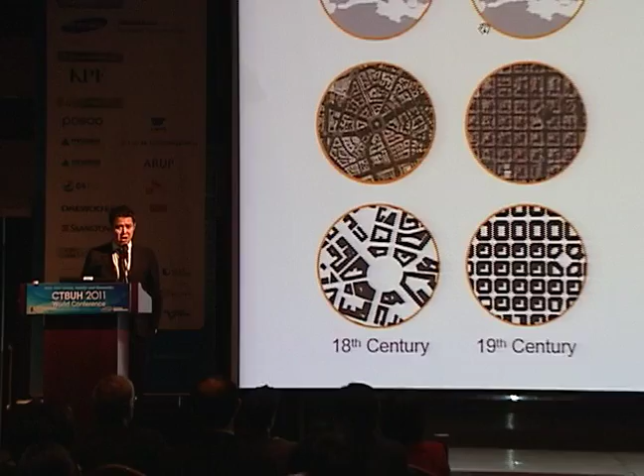I'm now living in Singapore, but I'm actually from the UK originally. Singapore is certainly a high-density urban environment, and we see many an Asian city going in that way. But when you look at these figure ground diagrams from the 18th century, be that in Rome, or through to the 19th century of Barcelona, or the 20th century of Portland, or even the 21st century of Singapore, what we see is the gradual eradication of those open white spaces. The white spaces that were once so intrinsic to our social interaction, our meeting and greeting, our means of movement through the city.

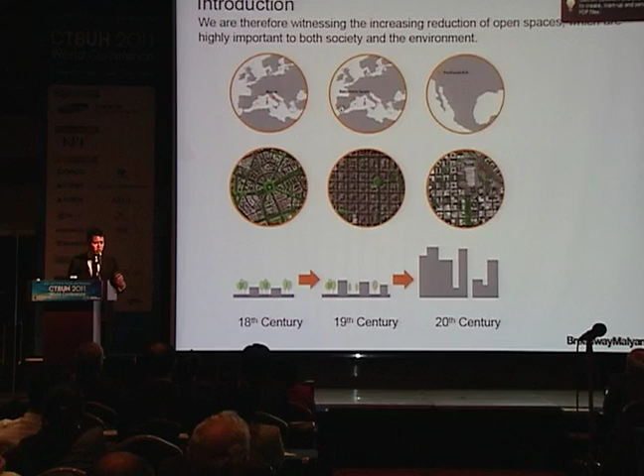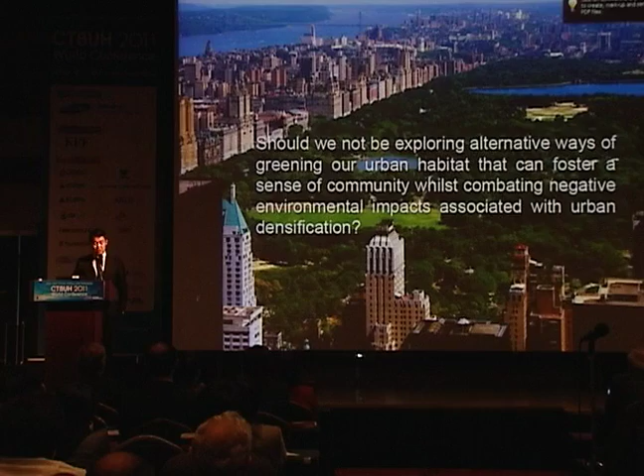Similarly, with the depletion of those open spaces, we're seeing the gradual eradication of those green spaces. Once upon a time, the green lungs of our city that allow us to have more communal environments and to have shade and shelter are gradually being eroded away. So should we not be exploring alternative ways of greening our urban habitat that can foster a sense of community whilst combating negative environmental impacts associated with urban densification?

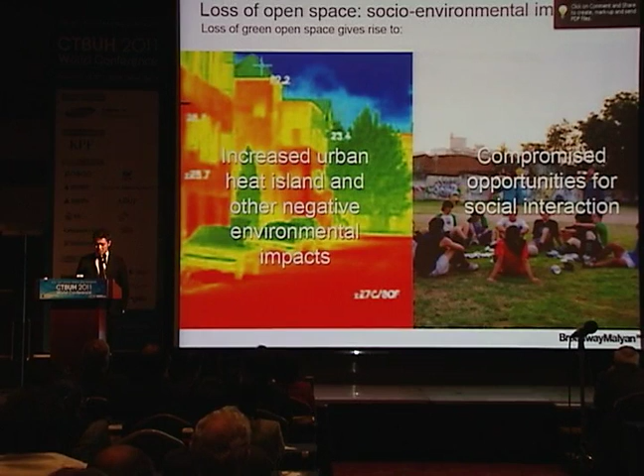So let us consider the loss of open space and the socio-environmental impacts. As I'm sure you're all aware of the urban heat island effect, with the loss of green open spaces we are seeing increasing rise to urban heat island effect and its other negative environmental impacts. But at the same time, we're seeing huge social implications. The opportunities that were once for us to be able to socially interact in public in these open spaces are slowly being eradicated.

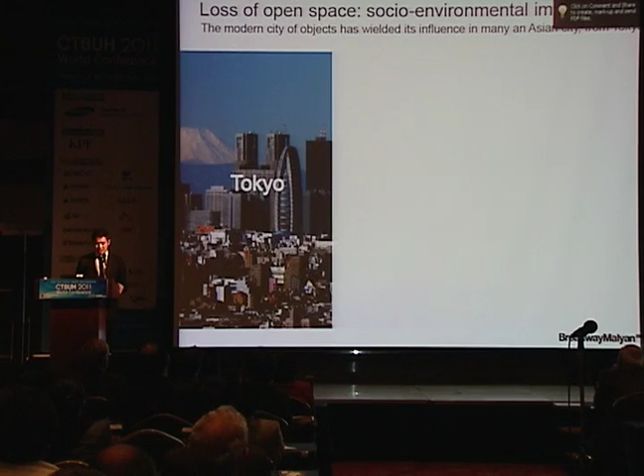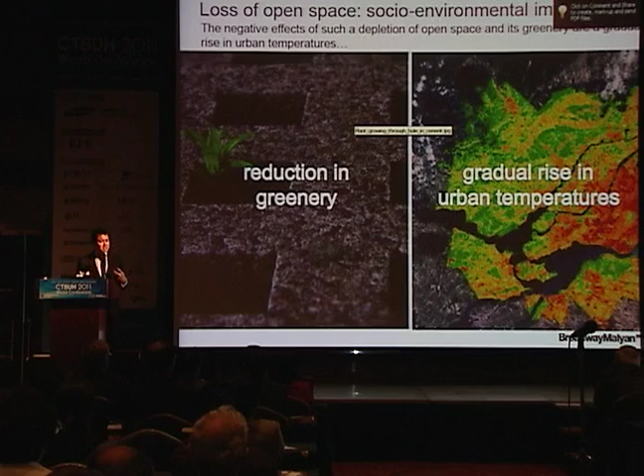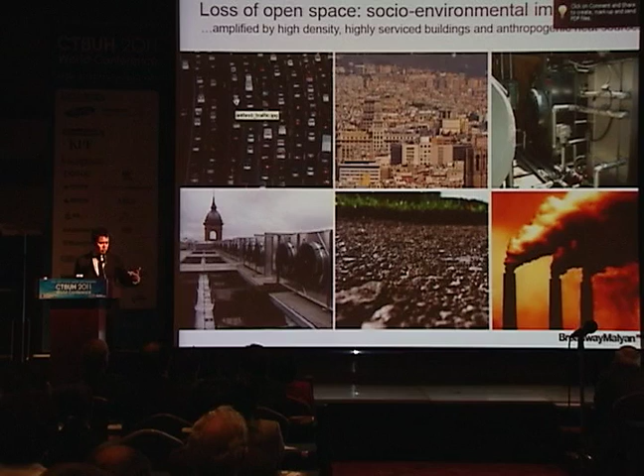I guess the modern city of objects, those gas-guzzling behemoths that we see in so many a city, be that Tokyo or Hong Kong or Singapore, is certainly also seeing the reduction in urban greenery. The negative impact of that, as I've just mentioned, is the gradual rise in urban temperatures. Urban heat island effect can be defined as the temperature differential between the rural and the urban habitat. And then when you think about the human amplification of high density, highly serviced buildings and the anthropogenic sources of heat, be that via the automobile or the air conditioning system or the harder surfaces within our urban habitat, it leads naturally to those cataclysmic effects of climate change and UHI.

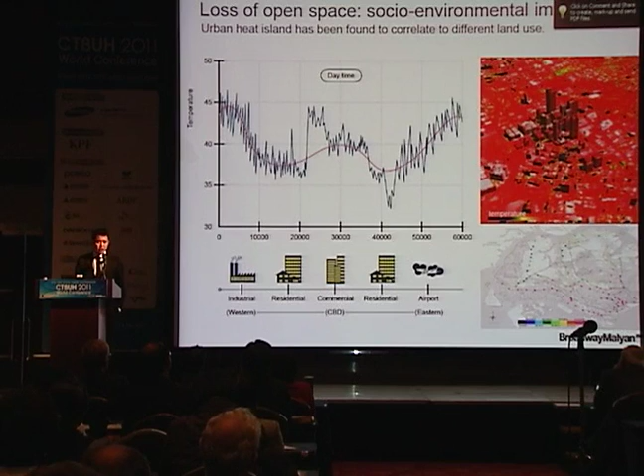Interestingly enough, the residential areas actually have the cooler temperatures given the expanse of green open spaces for residents to enjoy. But in addition to the removal of the greenery and the open space, we also see the compromising of certain social and spatial mechanisms.

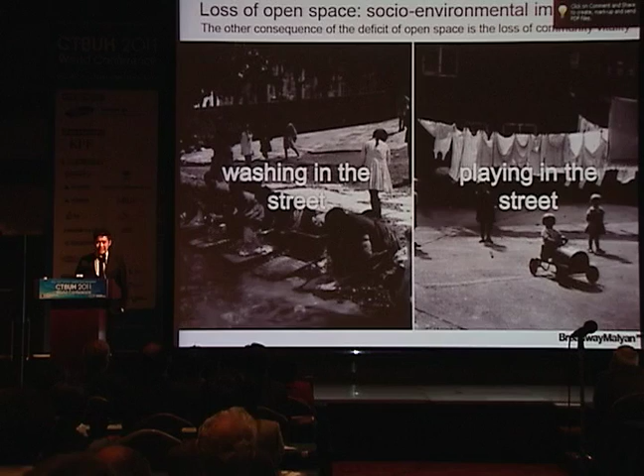The consequence of that deficit in open space is the loss of communal activity. Once upon a time, we used to be able to wash in the street or even play in the street. So what this means is that we're increasingly having to find alternative social spaces for social interaction.

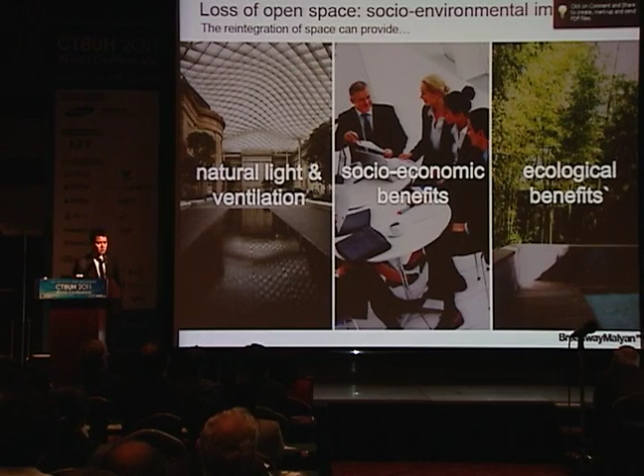After all, it is the space that provides natural light and ventilation. It provides certain socio-economic benefits and ecological benefits, which we will see in a few case studies.

As I mentioned, we see that replenishment of open spaces in our urban habitats today, particularly in the form of the skycourt and the skygarden within these increasing hybrid structures taking place around the world.

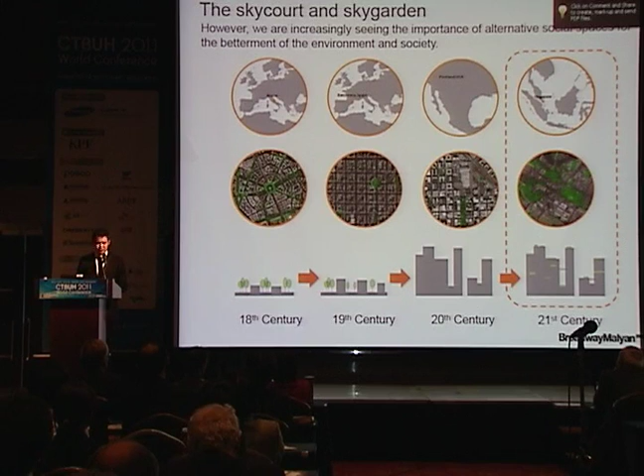One could argue that if in the 18th century the court was a social space that was an opportunity for philanthropists to give back to civil society, or even the 19th century arcade, then perhaps in the 21st century we're seeing an increasing quantum of skycourts and skygardens being given back for social means and civil society to enjoy.

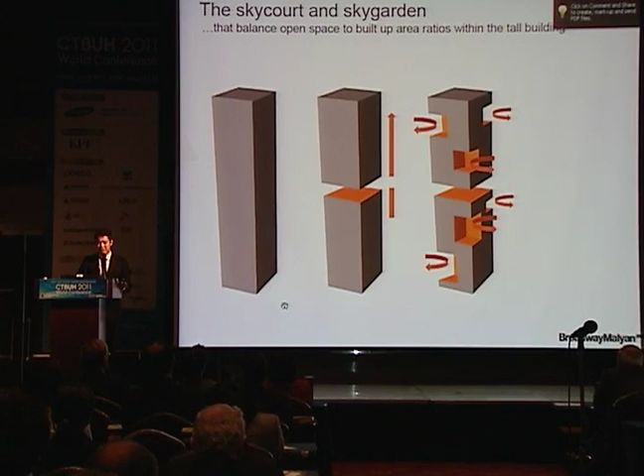Skycourts can be spatially defined as those interstitial spaces that take place within buildings that balance the open space to built-up area ratios within the tall building. And when placed at the top of the building, they can also create certain income-generating opportunities.

What we see in the form of the skycourt and the skygarden is the fact that they start to balance some of the loss of open spaces that were once so intrinsic to our day-to-day activity in the street and the square.

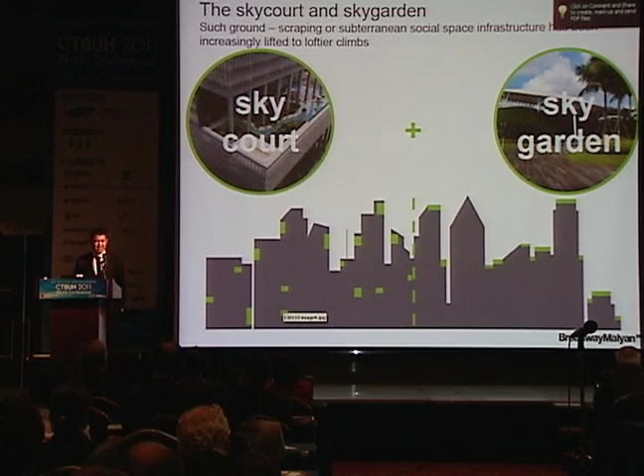In Singapore in particular, whereby temperatures can be quite high, we see lots of people running to the shopping mall to enjoy their 18 degrees centigrade of retail mall temperatures. But increasingly we're seeing similar flocks heading towards the skycourt and the skygarden, in addition to subterranean places.

I think it is quite important to note that in the case of Singapore, there are certain incentives. Singapore has taken measures to legislate the incorporation of skycourts, as can be seen in Singapore Urban Redevelopment Authority Circular 2009.

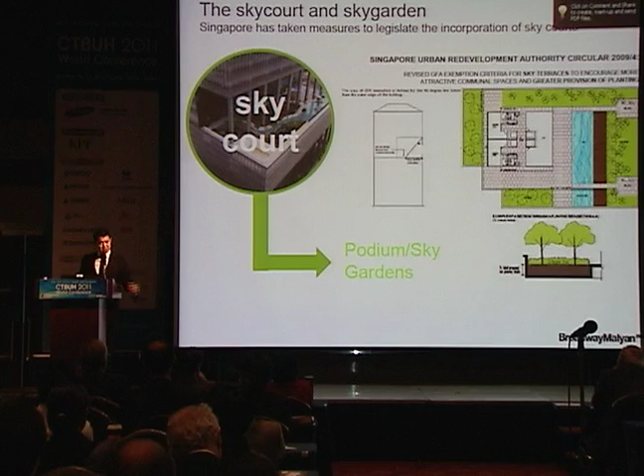The revised GFA exemption criteria for skycourts and sky terraces encourage more attractive communal spaces and greater provision of planting. Ultimately, developers are encouraged to incorporate skycourts and skygardens and can actually get exemption for GFA, thus being able to build more, all for the betterment of the building occupants.

We see this in some particular examples in Singapore. The National Library demonstrates the socio-environmental properties.

It actually has 16 stories. It's a state-of-the-art facility. I guess it is questionable whether it is actually a tall building, but then again, when you look at the context of the environment, it's about 5 to 6 stories in the region.

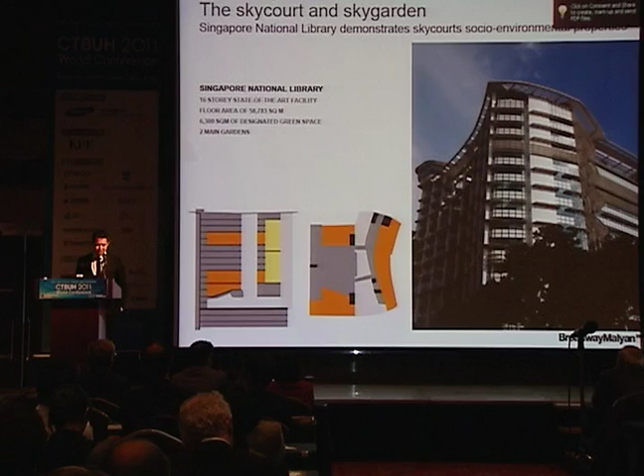But what is quite curious is that it has 2 main sky gardens, 6,300 square meters of designated green space in total. That provides an opportunity for good quality light to come in, and also ventilation for those who want to study outside, as you can see with these students here.

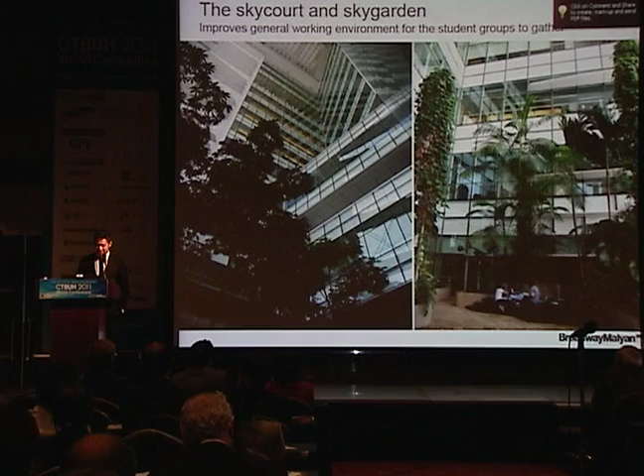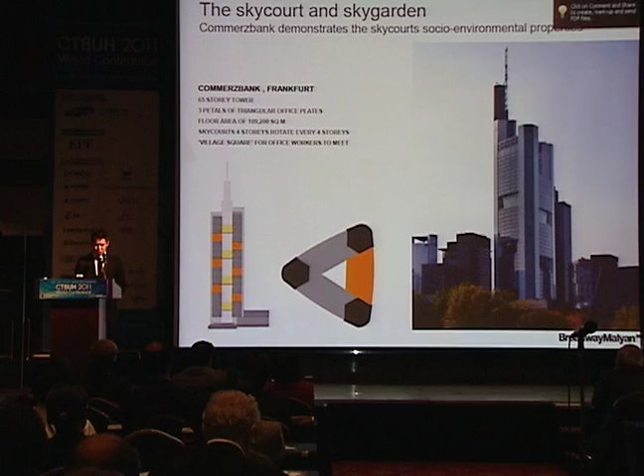As Anthony highlighted earlier, Commerzbank is a prime opportunity to see how you can start to integrate skycourts within an office building to foster a greater sense of workplace community and enhance productivity. 4-story skycourts rotate every 4 stories up and around the building to create essentially village squares.

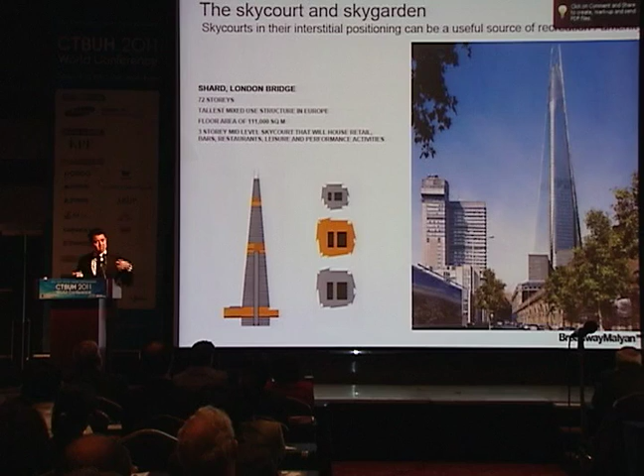The Shard in London Bridge, 72 stories, will be the tallest mixed-use structure in Europe. It has 3-story mid-level skycourts that will house retail, bars, restaurants, leisure and performance activities, ultimately acting like a spatial gel, gluing disparate facilities together for the interaction of the occupants. As Renzo Piano describes it, it's a small vertical town for about 7,000 people to work in and enjoy.

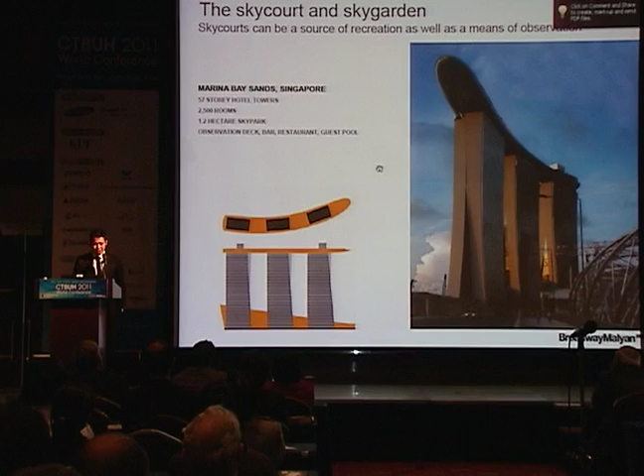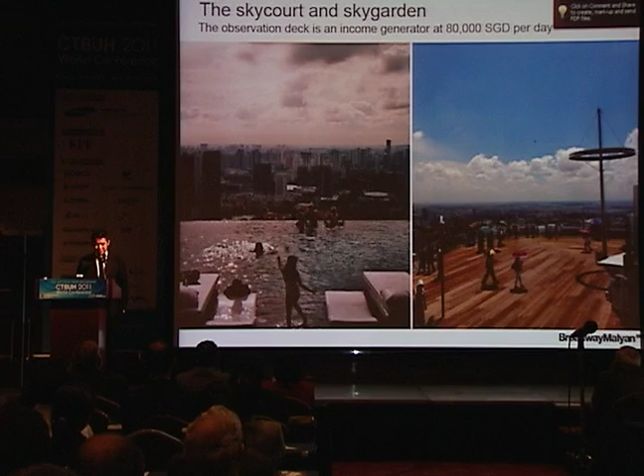Let us not forget the Marina Bay Sands in Singapore. At 1.2 hectares of sky park, it's quite colossal. But it's also an income-generating opportunity, as one wants to be able to get a view over the Singapore skyline, and it generates about 80,000 Sing dollars per day. Though I do not fancy anybody trying to swim to the edge. It is slightly scary.

What these examples demonstrate is a new hybrid that balances space within the object, opportunities for natural light and ventilation, opportunities for social interaction, opportunities for an ease of movement. But at this current point in time, there are some fundamental issues: they are not public spaces. For the best will in the world, we want them to be, with the characteristics of the public domain that we see on the ground. We have got a long way to go.

But yet again, they do have certain public domain characteristics, opportunities for us to interact. And it's generally the public sector, in terms of the library, that is actually having a greater opportunity for those open spaces to be incorporated in them.

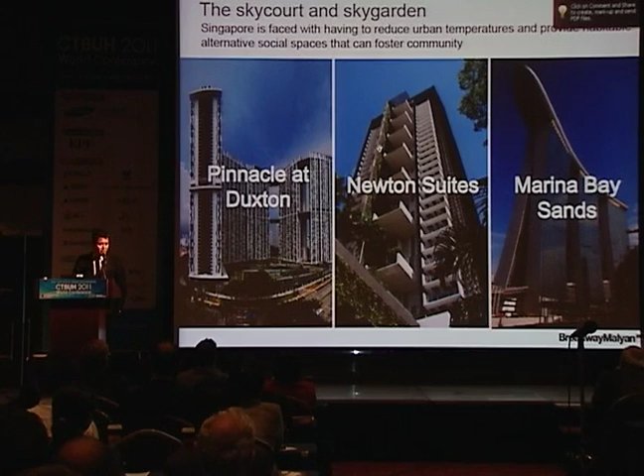Singapore is faced with significant issues, urban heat island effect, as well as a rising population that from 5 million people will be 6 million by 2020. So the importance of being able to balance space as well as greenery within these hybrid structures is coming to the fore in examples like the Pinnacle at Duxton, a residential complex, Newton Suites, and the Marina Bay Sands.

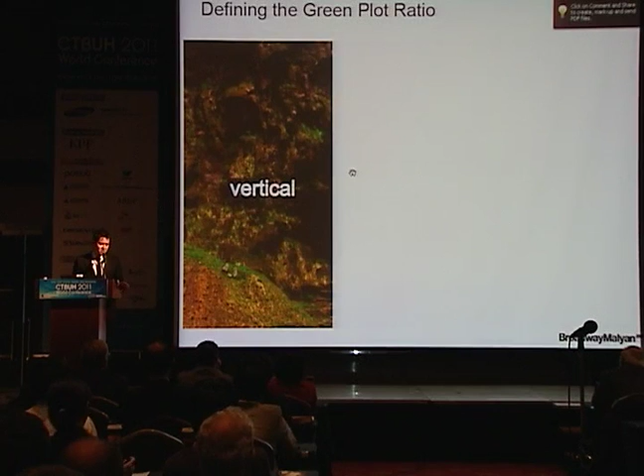So what of the green plot ratio, and how does this tie into the whole idea of skycourts and sky gardens? Well, what we need to bear in mind is that greenery doesn't just exist on the horizontal plane, it's also the vertical and the diagonal. Similarly, we're increasingly seeing the incorporation of greenery on those vertical, diagonal, and horizontal planes.

We only have to look at Chicago, for instance, and see how the 2.5 million square feet of rooftop greenery has been able to reduce ambient temperatures by between 1 and 4 degrees centigrade through the ethos of Mayor Daley. So increasingly, the incorporation of urban greenery is certainly helping us control those ambient temperatures.

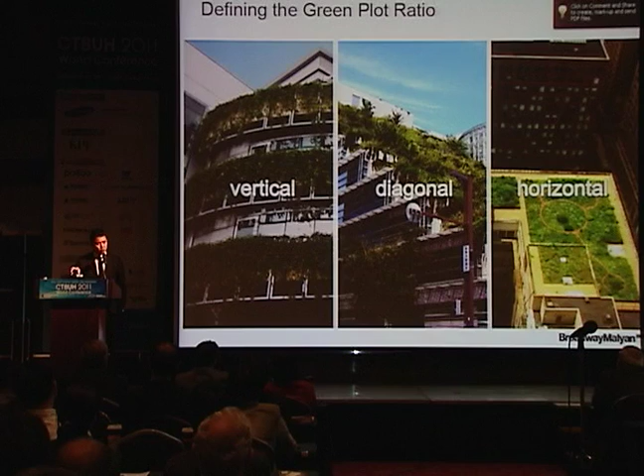This was something that the Singapore government were particularly keen to try and explore, the idea of being able to quantify the greenery, to be able to understand what the properties of that greenery are, whether that's water retention or carbon sequestration or the ability to reduce ambient temperatures.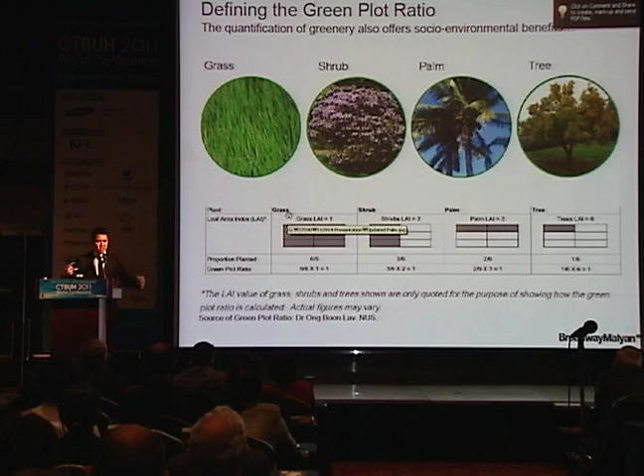Grass, shrubs, palms and trees, they all have different leaf area indexes. They all have a different area of greenery. And so when you look at a shrub which actually has quite a lot of density, it actually has greater water retention and urban ambient temperature reduction properties over, say, a sparse palm tree.

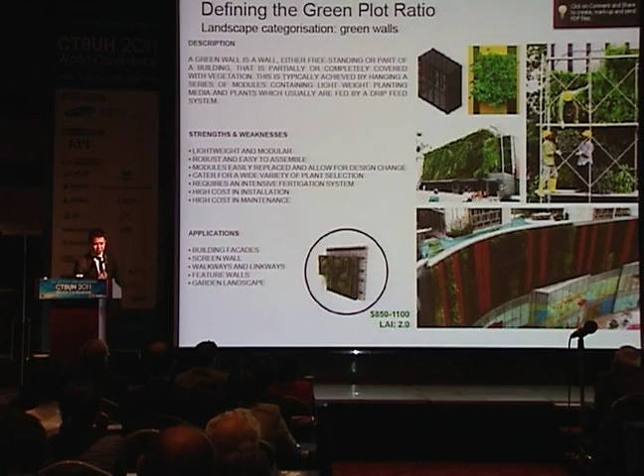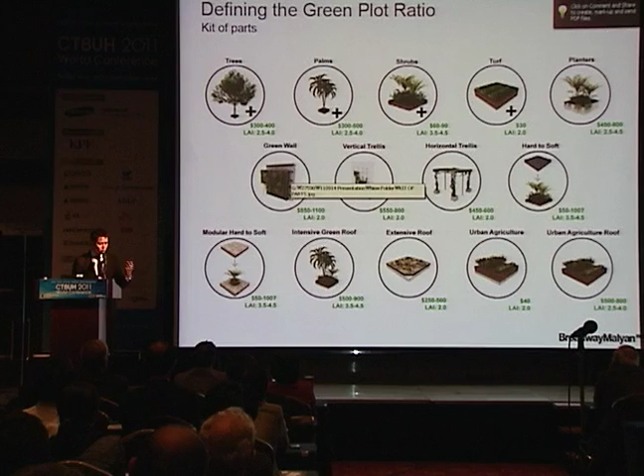This led us to a review of 100 buildings and their landscape sites within Singapore, looking at the residential, industrial and commercial centres, and allowed us to then start to categorise the different types of urban greenery, be that green walls or planter boxes, which allowed us to eventually get to a kit of parts, a 1 square metre kit of parts that each had its own leaf area index and own biological measures, each quantified per square metre.

What this allowed us to do was then to apply this across the horizontal, diagonal and vertical surfaces of tall buildings in order to look at how it could mitigate glare, how to mitigate ambient temperatures rising, and also to actually try and improve the thermal performance of the building.

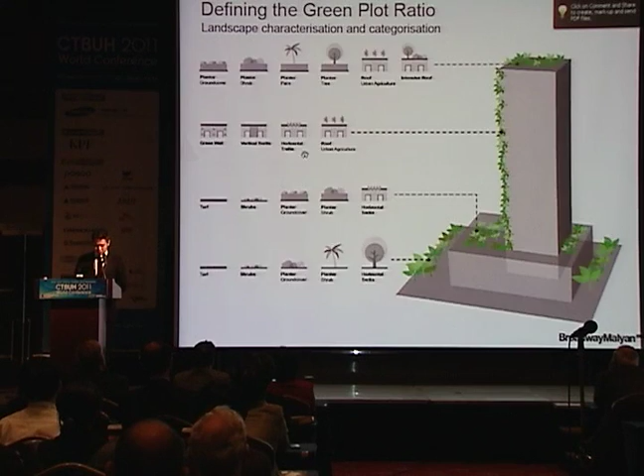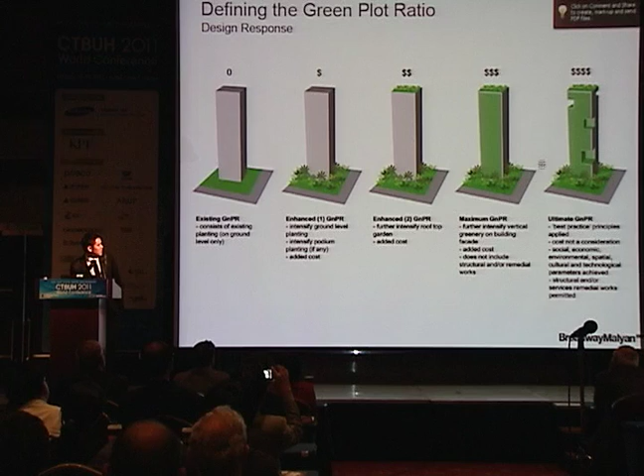It also allowed us to start to quantify the incorporation of greenery, be that from just the horizontal plane to then densifying the greenery, placing it on the rooftop, placing it on the surfaces, or even cutting in skycourts and sky gardens for further social and economic opportunities.

This is something that we're now applying to buildings, and it's, I guess, quite apt that this section is on compact and green. This is not a tall building. This is actually a bit of a baby. It's only 12 stories in height, quite compact.

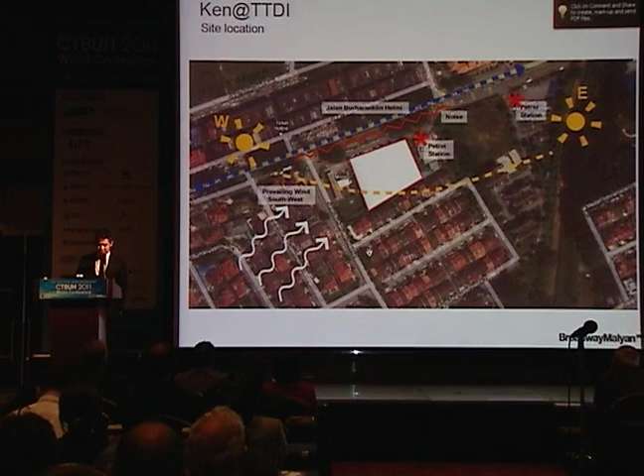It's a site in Kuala Lumpur, to be precise, a place called Taman Tun Dr. Ismail. And the site was originally a greenfield site which had a green plot ratio of 1.13. So we added up the quantum of trees and palms on the surface, and you basically add up the leaf area index and you divide it by the site area to give you the green plot ratio.

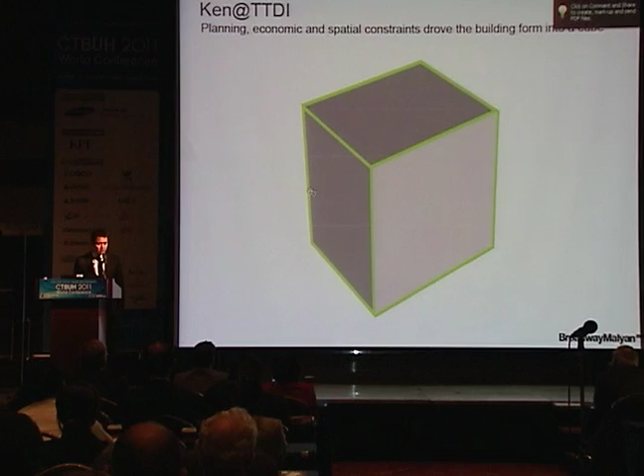Given the planning, economic and spatial constraints, it drove the building into a slightly more extruded cube. What was quite curious about the building program, though, is that it's actually a very, very mixed use and compact building. Workplace, hospitality, retail, lifestyle, arts and leisure all come together in this building.

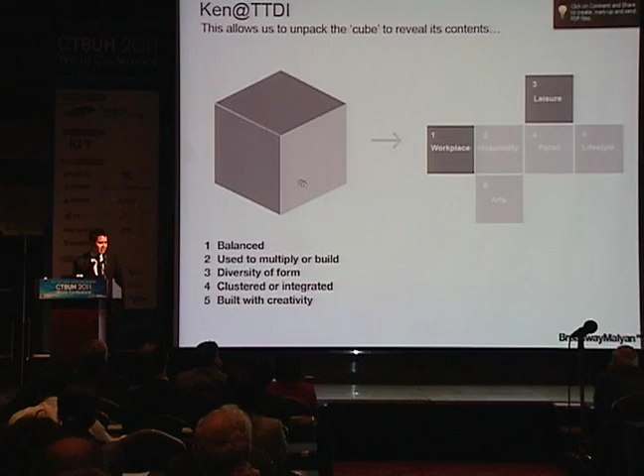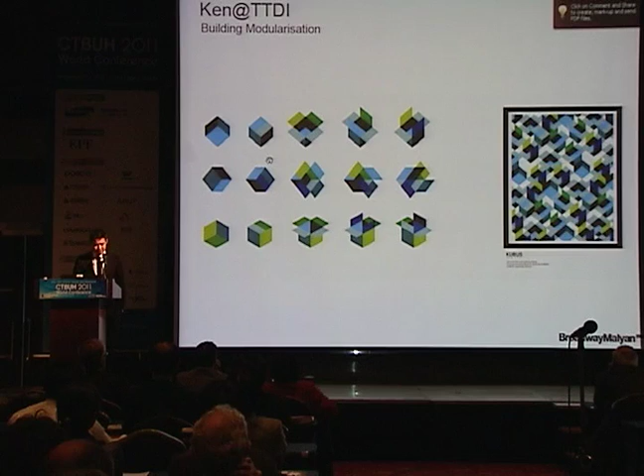Somewhat metaphorically, it actually responds to the 6 sides of a cube. It allowed us to then explore the idea of unpacking that cube, which could then also help inform the facades by thermally mapping the facades in order to be able to position the greenery.

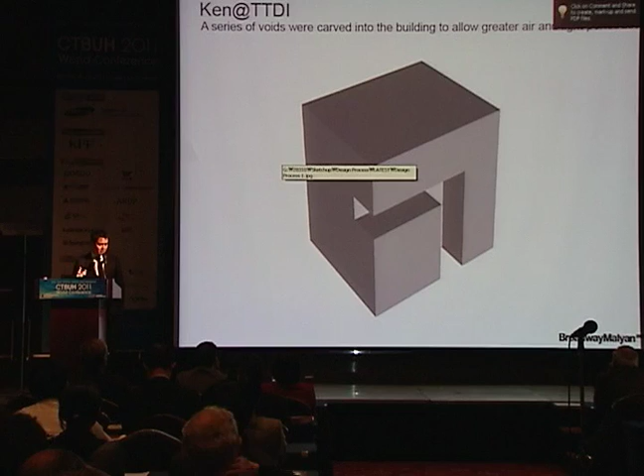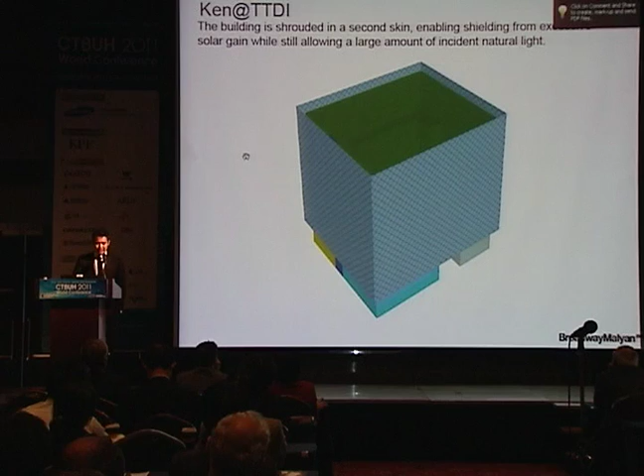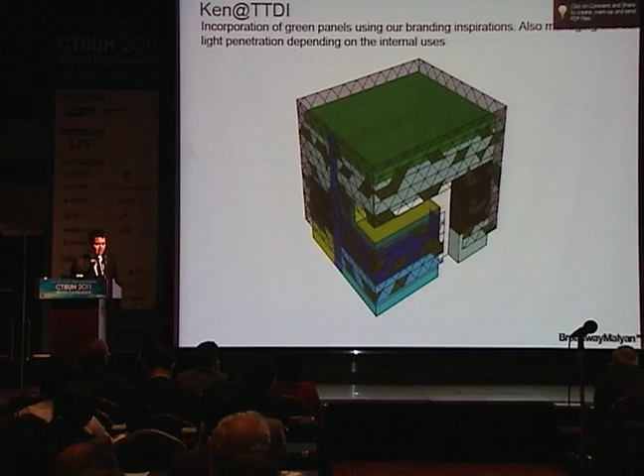This compact form allowed us to start to cut a series of voids for the opportunity to draw in natural ventilation and natural light. The mixed-use program of those 6 disparate functions were then strategically placed, and a skin was wrapped around the surface that would then allow us to cut further holes and apply a series of green panels and expanded mesh that would almost be mapping out the thermal performance of the building.

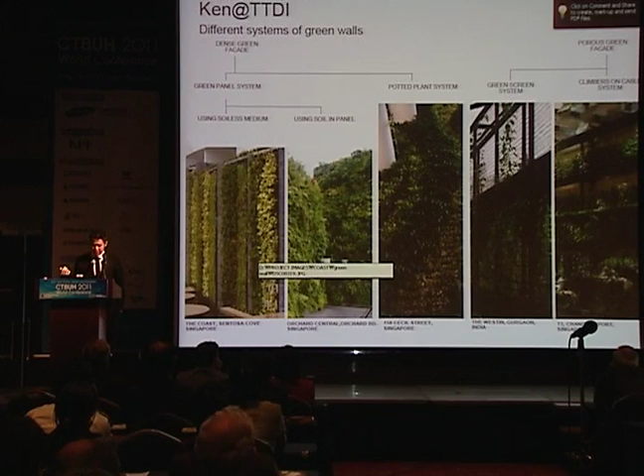So the idea to try and look at vertical greenery as an environmental skin, if you will, allowed us to move forward to look at the different leaf area indexes of different types of vertical planting. Some are actually far more dense, which would be ideal for areas whereby there is a greater amount of solar heat gain, be that to the east and west elevations, and slightly more porous and open where you wanted to actually get a bit more daylight.

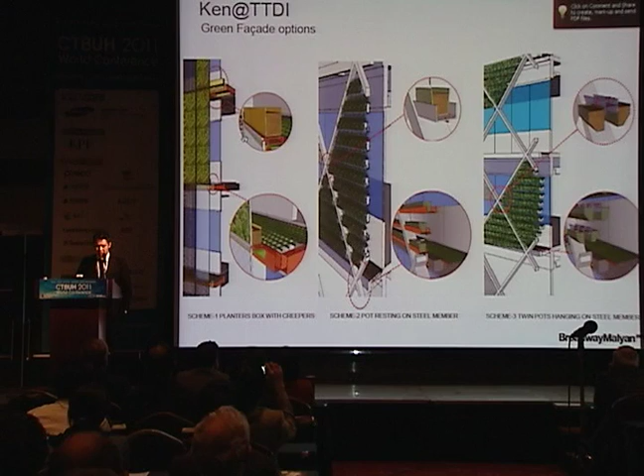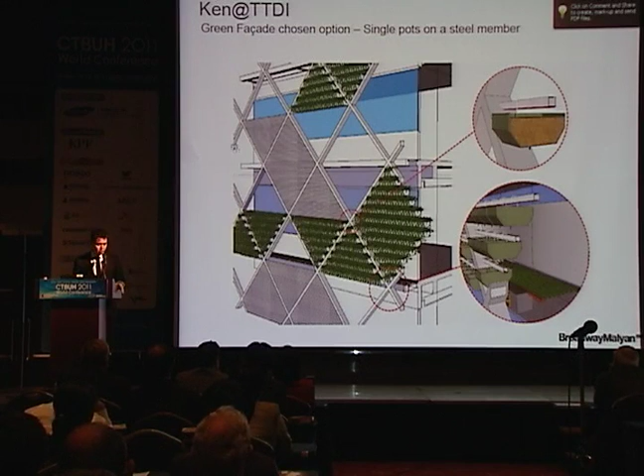This then lent us to a various series of studies to look at the various hanging options before we got to a planter pot solution that was hung within a diagrid mesh, expanded mesh, that would allow for light to percolate through, but also to rely on the greenery to actually improve the thermal performance to the east and west facades. This was actually mapped out, and what we saw without this mesh or greenery was that the average west-facing facade received direct radiation of around 700 kilowatt hours.

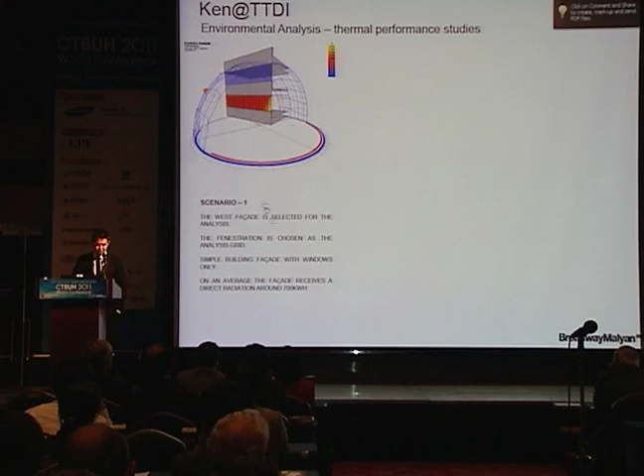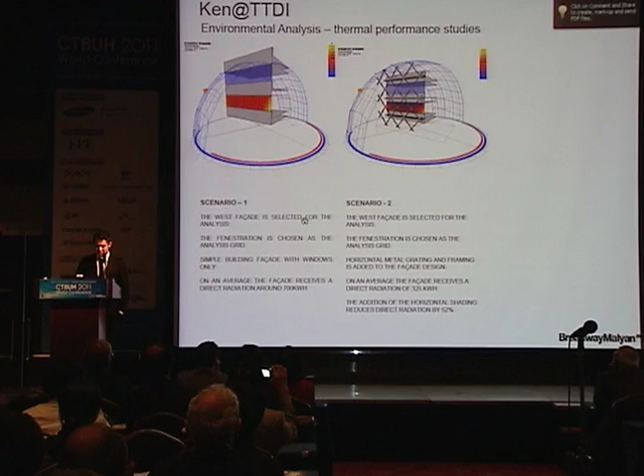When we added the mesh and grating and the grid structure, it actually reduced the direct radiation by 52%, but then it was enhanced further with the incorporation of the greenery by 16%.

We also noted that there was an improvement in terms of glare performance. So the ability to consider the external skin as a continuation of the greenery from the ground into the sky, by having that continuum along the vertical surface, also provided the environmental benefits of providing a bit of a shield to the harsher conditions of the tropical climate.

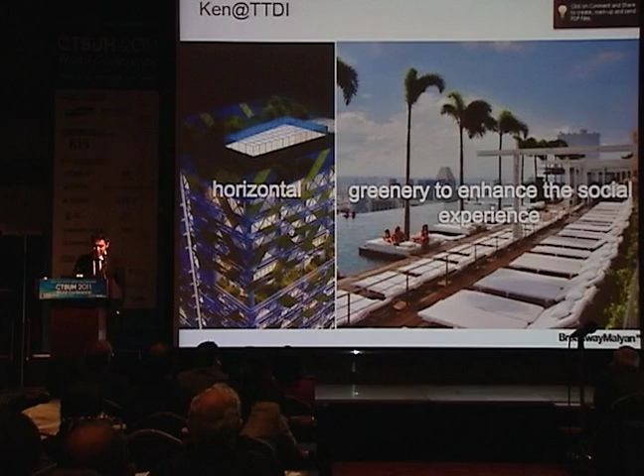In terms of the horizontal plane, we wanted to experience the more social and communal activities through the skycourts and the sky gardens. Children's play areas and creche areas, herb gardens that would allow us to actually grow vegetation for the on-site restaurants, swimming pools that could also be water retention areas so that the water collected could be used for the irrigation of the planting, and outdoor gymnasia and yoga decks were key for the survival and the replenishment of those activities for the workers within the building.

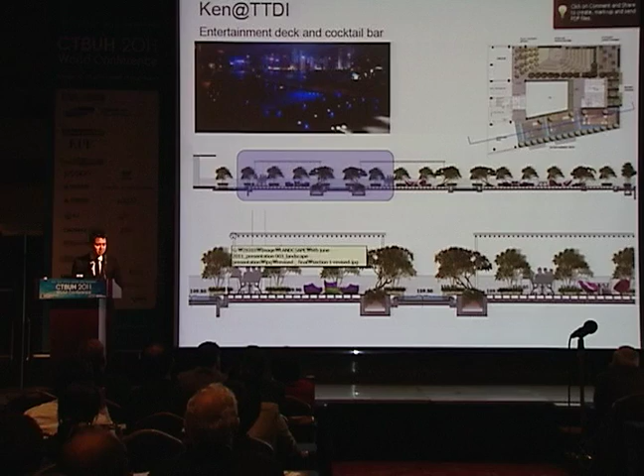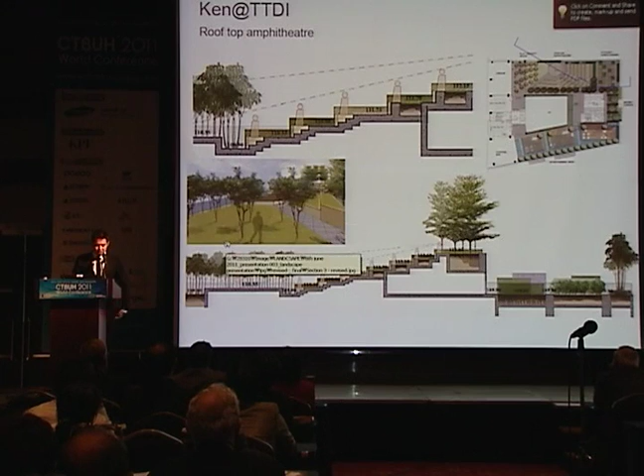It also had entertainment areas that could be income generating, and an amphitheatre deck. So all of these different spaces were not only for social betterment, but it was also an opportunity to be harvesting the additional rainwater that could be then used for irrigation of the planting.

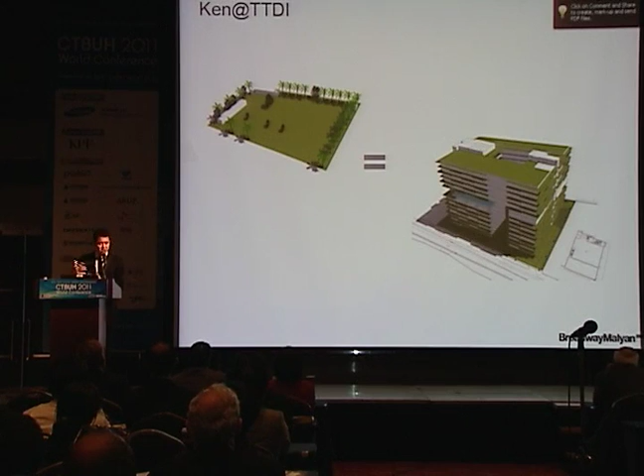The net result was basically the ability to not only balance the existing greenery on the site, and I think it's important to note here that if you have 12 trees on a site and you were to remove the 12 trees for urban development, would we not want to be replenishing the 12 trees? Sometimes you don't have that space, but by using the green plot ratio method, you're able to still balance the quantum of greenery by looking at shrubs and vertical surfaces and diagonal surfaces in order to create that sense of equilibrium.

So what was originally 1.13 in terms of green plot ratio, we were able to actually increase the greenery to 5.98 at a cost of $3 million. What this meant was that we are now able to assess the energy savings based on that additional greenery.

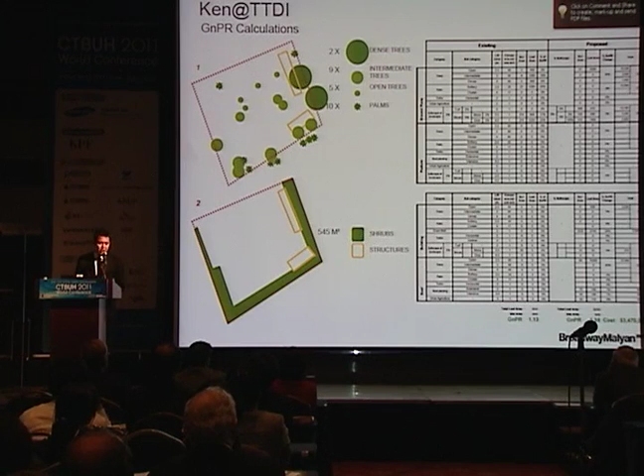I think that means I'm going to be wrapping up soon. I assure you that I will be finished within the next 2 minutes.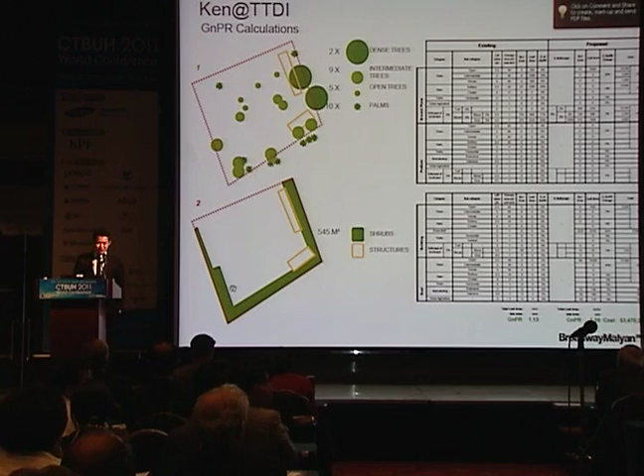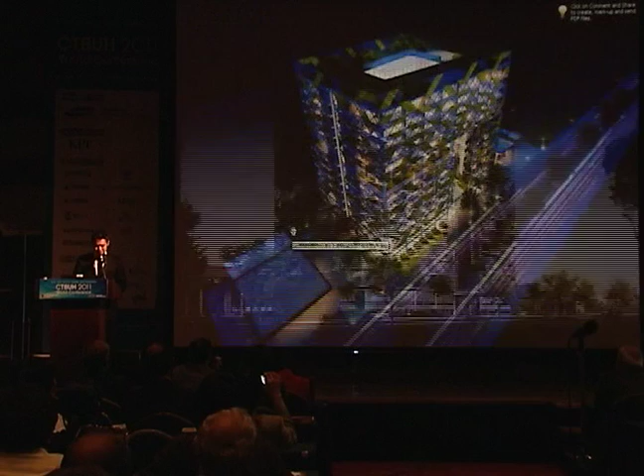So, it's almost like voiceover man. So what started out as an idea of having an environmentally performing skin has also been vertically extrapolated into social spaces in the sky. And to the conclusion.

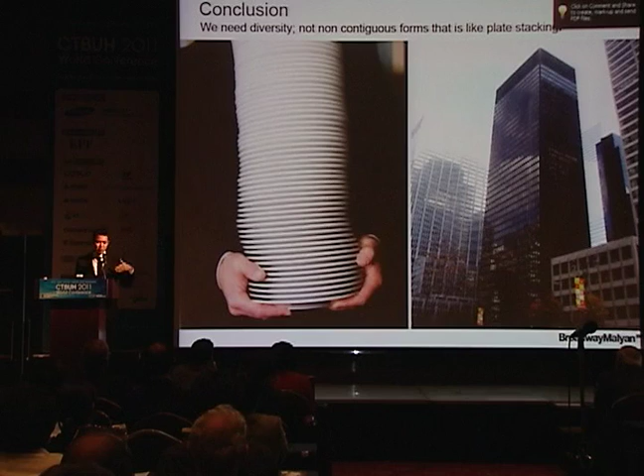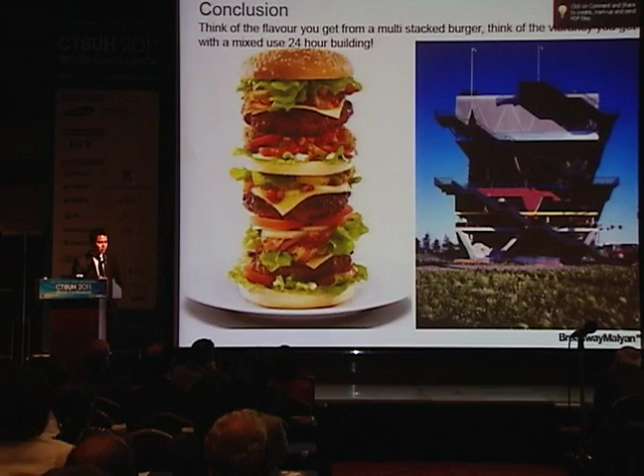I liked what I saw earlier, Anthony. You actually had an image of the same building, and I think we're increasingly moving away from that simple plate stacking exercise to something far more diverse. If we can start to imagine the lettuce being the actual vertical greenery, perhaps we're somewhere along the lines of a 24-hour mixed-use development, something that was so intrinsic within the TTDI building.

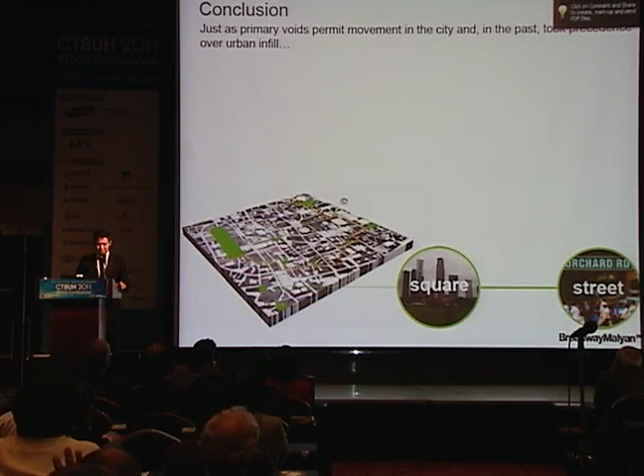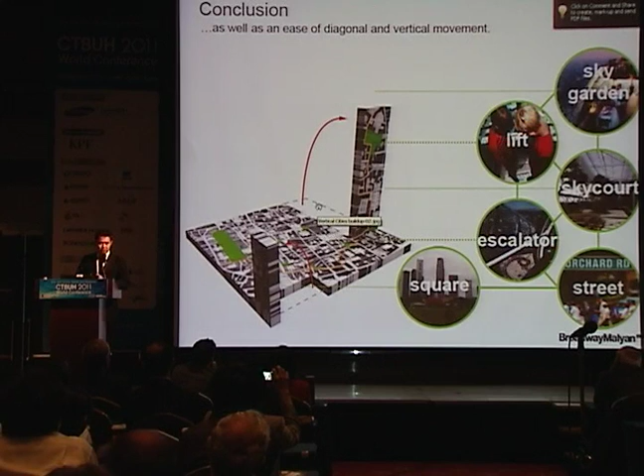We should start to think about the primary voids within the city that often permit movement far more vertically. How can the skycourt and the skygarden start helping replenish the loss of open spaces by vertically balancing, incorporating open lift and escalator strategies that are far more permeable and far more legible?

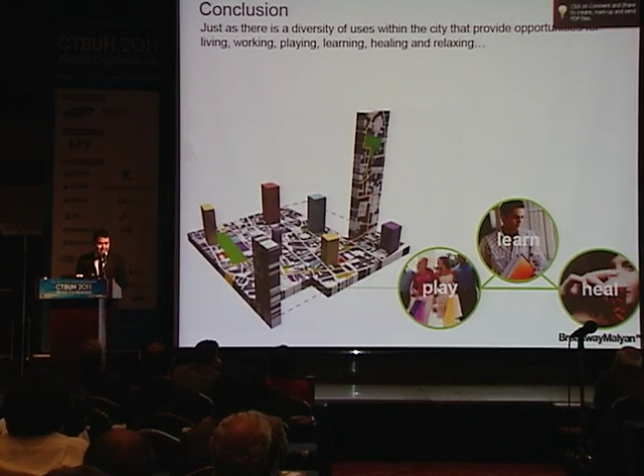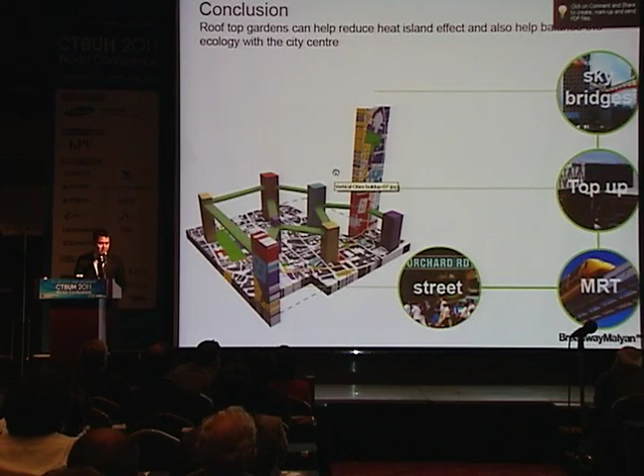And if the diverse city that Jane Jacobs waxed lyrical about is about the sum of the parts, then perhaps the tall building is similarly a vertical extrapolation of the city. That when we start to interlink it can provide ease of movement, and when we start greening the rooftops it can actually help address some of those issues relating to ambient temperatures and also the enjoyment for the residents

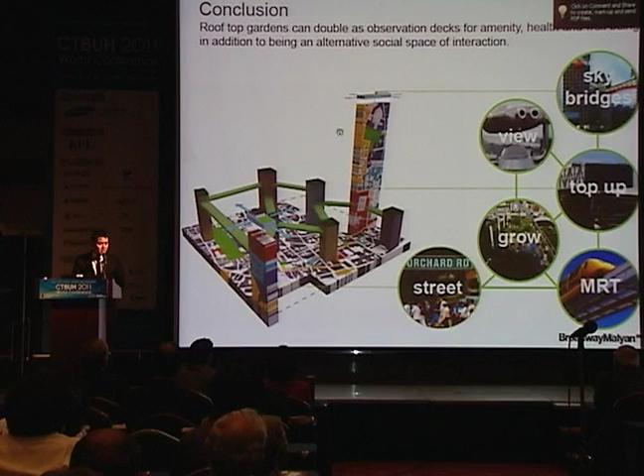or the workers. And let us enjoy the city. Crowning it with observation decks can also be income generating opportunities, so that we can then appreciate the city more.

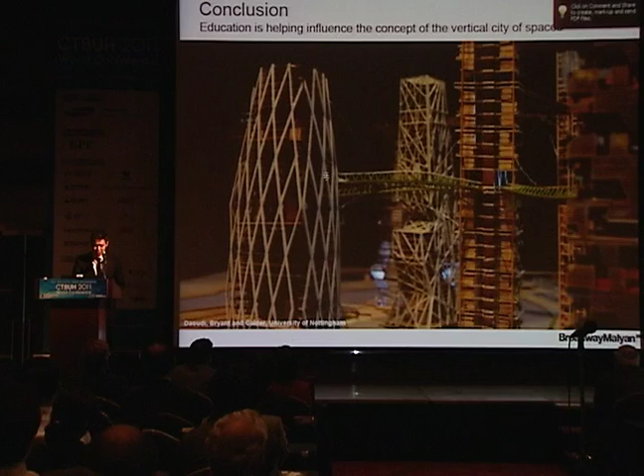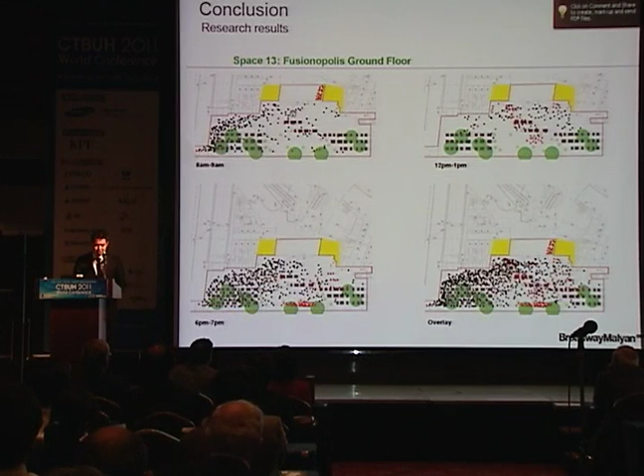This is happening in universities around the world. University of Nottingham has a wonderful Masters of Sustainable Design course that also has a tall building component. And this is also helping us do more active projects within Singapore that look at the correlation between urban greenery and the use of space — we can start to see a correlation between greater green plot ratios and actually greater amounts of pedestrian movement.

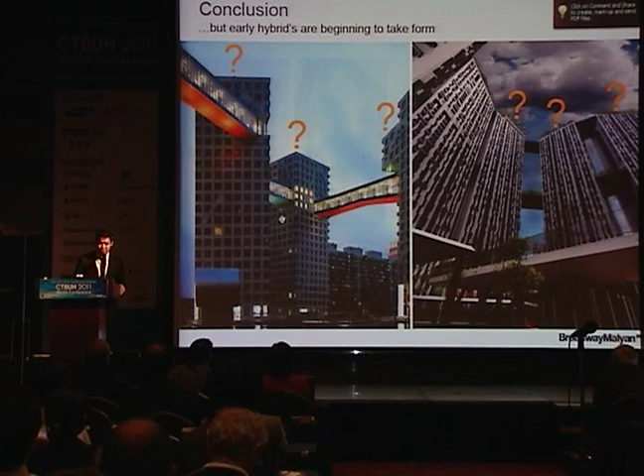So we are yet to get to that utopian vision of the future, but somehow I think we're getting quite close to it. Let's keep on the dialogue. Thank you very much for your time.

Okay, thank you for your presentation, Professor Jason Pomeroy, and sorry about the noise during your presentation. He's given us considerable inspiration about a new type of open space.

It's not working now. Actually, now we are living in the time of internet revolution, and the concept of a conventional open space is transforming, or has to be changed. So I agree with the idea, and actually most of us act differently now — we like eating individually, we play individually, and sometimes we prefer to communicate with each other in cyberspace rather than the real world. So I think the concept and the form of public space has to be changed.

So at this point of view, he suggested a lot to us. It's a great chance for us. And now, it's time to— oh, sorry about this.